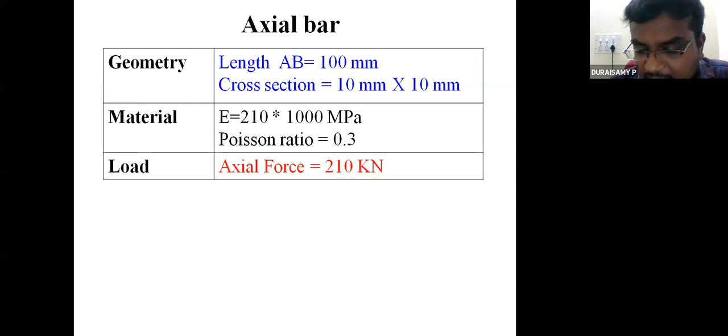So these are the parameters, shown graphically in pictorial view. At the bottom, a 100 mm length is shown. A is one point, B is another point - left face center is A, right face center is B. The distance between these two points is 100 mm, and the cross section is 10 by 10. This is the pictorial view of the geometry.

The material used is steel, with properties of 210 gigapascal and Poisson ratio 0.3. The axial force is highlighted at point B, acting along the length direction, along the 100 mm direction, with a value of 210 kilonewtons. The force acts at point B, while point A is fixed.

In this case, we are going to calculate some parameters associated with the problem. The end A, the surface pertaining to face A, is perfectly fixed. At the surface at point B, you apply a load of 210 kilonewton, which is an axial force. Because of this force, what can we expect? If you are doing a test with this kind of specimen, this load, these conditions, what can we expect? Generically, with the help of the material, we can calculate the stress - how much stress develops because of this much force.

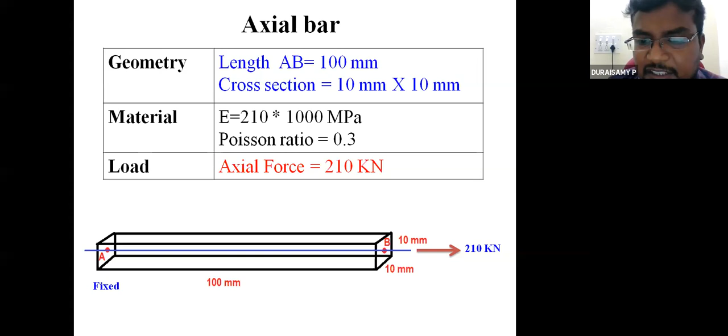Second, we can calculate the elongation of the bar. If you apply this much force, how much does the bar elongate? Those two things we can calculate very easily from strength of materials, so that's what I did - I will show that. The bar is fixed at the left end, and we apply the force at the right end, at point B.

Just assuming the point at B, we are not applying the force on the section, just applying the point. So for understanding, we can call this stress. Stress is nothing but force by area.

Fine. So force is 210 kilonewton by area 10 by 10, 100 mm square, and stress is this much. Just took the number, don't worry about the mathematical calculation behind that, just get the number of it. Second thing is deformation or elongation, both you can use it. So what is the deformation? The formula from strength of material, just substitute all the parameters, and you are getting 1 mm.

I can able to calculate stress as well as deformation. Now the 1 mm is elongation, right? So 1 mm elongation is happening at which place of this structure? Can you able to justify it? Students or participants, kindly unmute your mic and give your knowledge, or just justify it. Whether the 1 mm deformation or elongation is happening at what location of the structure, the axial bar.

Just to make it interactive, then only we can able to understand and appreciate it later on stage.

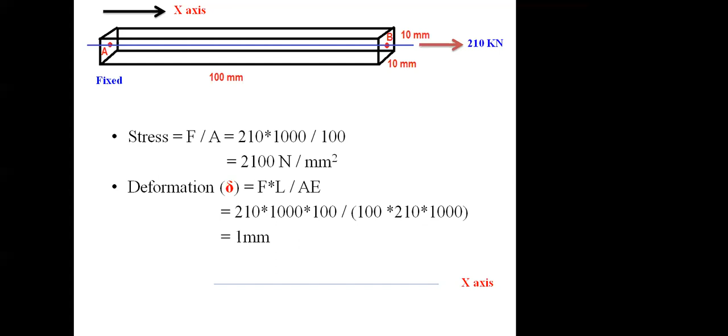Okay, participants, faculties or students, kindly post your answer to this in the chat box. The deformation 1 mm is exactly, you can able to measure at which place of your structure. The 1 mm we are getting out of simple calculation, it's fine, very happy with the result. But 1 mm deformation or elongation, exactly at what location is it happening? Whether end A or end B or somewhere in between point A and B.

So end B, okay fine. Someone is saying at the center, and most of the answers, majority is end B. Okay fine, so the 1 mm elongation is happening exactly at the point B. A is perfectly fixed, so we cannot move it. So fixed means the deformation elongation is equal to 0 as per our conceptual understanding. So end A is equal to 0, end B is equal to 1 mm.

That's fine, so we can represent it in another diagram. In 2D view, end A, end B, then B is moving 1 mm. So B is moving from B to B dash, so we are getting delta is equal to 1 mm. These results we are getting from strength of material, elementary strength of material concepts.

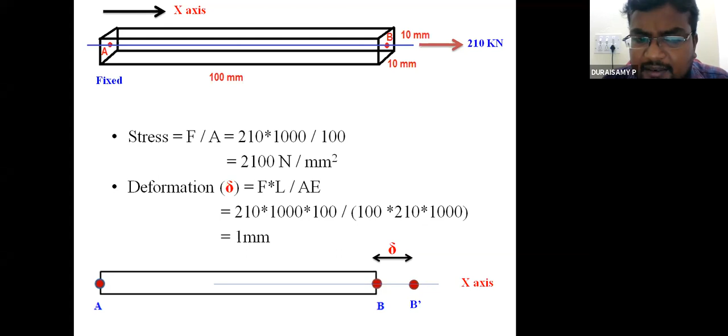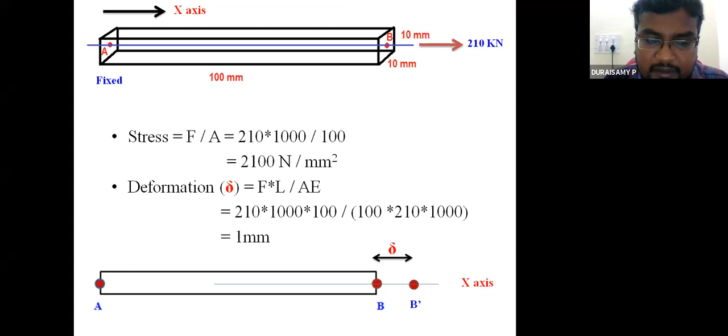Now my requirement is, I would like to calculate the elongation at the midpoint of the structure, or somewhere else, not at B, not at A. Just my requirement is I should find out the value of elongation at the midpoint of a structure, or somewhere else. Then what I can do? Whether my strength of material will help to calculate the value. Actually strength of material, it is not easy to do that. There is no way to get it in the simple deformation delta formula. It will give only the free end elongation.

So in this situation, I would like to calculate at the point C, which is 50 mm from A, it means exactly at midpoint. So in this situation, finite element analysis will help us get the value, to get the elongation at point C. So how are we going to get the value of elongation at point C? We will see what procedure you have to adopt to get it in finite element analysis. The deformation or elongation at any point of structure, strength of material will give the idea that elongation is happening 1 mm only at the point B.

That's all we can get from strength of materials - it won't give more than that. If you want the elongation of the structure anywhere, at any point, you can only get that from finite element analysis. At this point, we have to think and talk about FEM, finite element analysis.

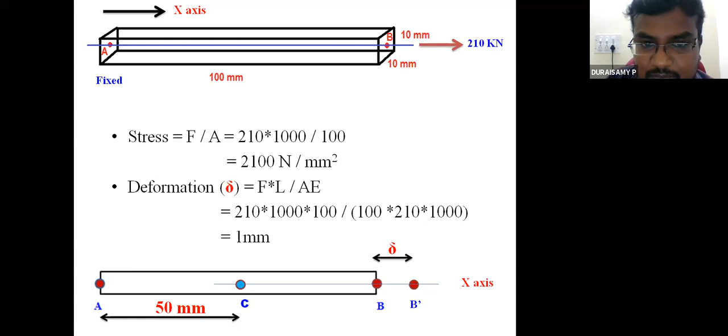So my requirement is to calculate the elongation at point C, the deformation at the midpoint of the axial bar. From these existing calculations, you can infer - not assume - that we can get the deformation or elongation happening only along the axis of the structure. We are ignoring the other two directions, so only the length direction is calculated - how much it's elongating in that direction.

We are ignoring the other two dimensions because the structure dimension is 100 mm by 10 mm by 10 mm. So 100 is a huge value, 10 by 10 is a smaller value. Because of that, whatever response happens in the 10 by 10 cross section, we are ignoring that study. One more condition is the left end is fixed - we are saying that end is perfectly fixed, so there is no movement, the displacement is fixed at the fixed end. These are the two inferences from the problem.

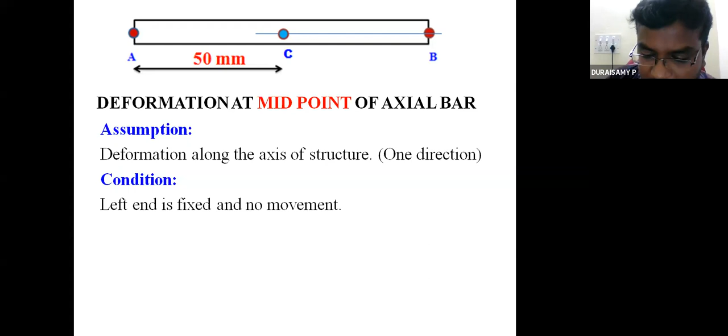Now we have to introduce finite element analysis - how this will be helpful. FEM is a purely numerical technique. It will give an approximate solution to the problems. It will try to give exact solutions, but it is a numerical technique. If you modify the problem, fine tune the problem-solving methodology, fine tune the parameters you're using, only then can we move closer to the exact solution. So it won't give the exact solution at the beginning stage itself.

So this is basic FEM - it's a numerical technique that gives approximate solutions to boundary value problems. It won't give the solution for initial value or time-dependent problems at this stage.

The first step is discretization of the structure - you have to divide the structure into different subdomains. Then step 2 is to select appropriate polynomial equations for the divided or discretized subdomains. We have to formulate the element stiffness matrix, assemble the stiffness matrix of all elements, and form the load matrix and total load matrix. Just read through these, then we'll discuss one by one in detail.

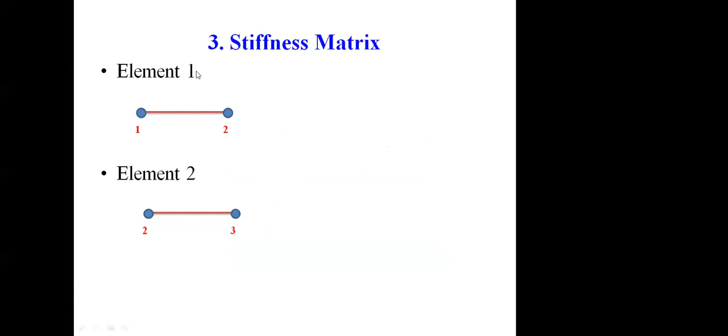Is it visible? Yes, sir. Okay, fine.

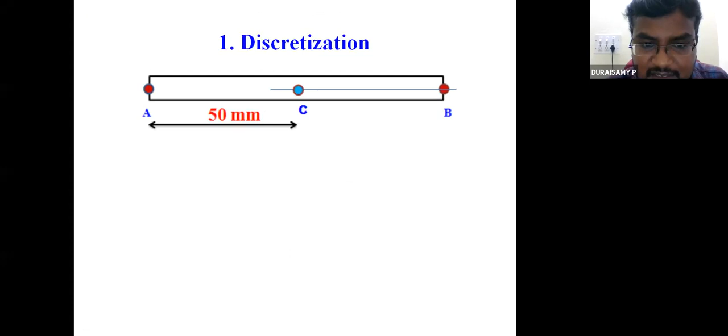We are dividing into just two domains. Just remember this: A to C is element 1. So A is replaced by number 1, C is replaced by number 2, then B is replaced by number 3. So 1 is A, 2 is C, just numbering from the left end. So A is 1, C is 2, then B is 3. That's the number I used for the calculation. So element 1 is 1 to 2, element 2 is 2 to 3. So we have two elements.

We have to formulate some stiffness matrix, what it means. Before that, just get some idea. One more thing I'd like to convey.

Everybody knows the spring, how it behaves, and what is the equation to capture the spring behavior. The thing is, force equal to K into X. Force is the load we are applying. K is the stiffness parameter of the spring. X is equal to displacement because of the load. If you are not applying the load, the displacement is equal to 0. That is the fundamental equation of spring.

So we are incorporating this equation as the equilibrium equation in finite element methods. How can we incorporate it? What way can we incorporate it? There's so many questions that will arise while directly introducing the spring equation into the FEA. How does it happen? Simple, I will show this for justification purpose.

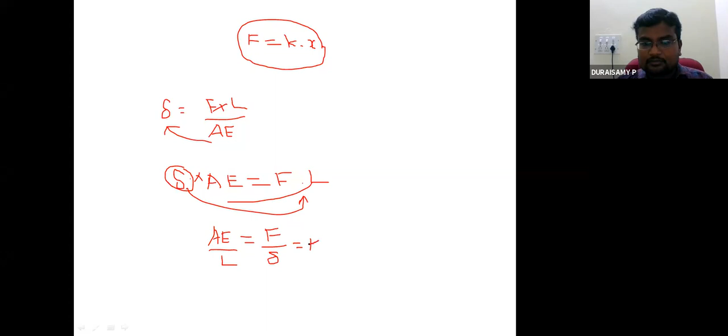Simply, force by deflection is equal to stiffness K. So we can equate these two with a spring, and we can say this one and this one are also equal, all are equal. So we can say AE by L is equal to F by delta is equal to K. So the meaning of stiffness is equal to force by delta equal to AE by L. A is the cross sectional area of your geometry, E is Young's modulus of the material, L is the length of your element.

Just rearrange this equation, take only this portion: F is equal to K into delta. This is similar to our spring equation. It's not only applicable to spring, you can use it anywhere. So force is equal to stiffness into deflection or elongation. Here X is the symbol used, here delta is used, that's all. In our calculation, U is used to represent the displacement. The meaning remains the same, only the letter or symbol is changing. So force is one thing, stiffness is another, and deflection or elongation is the third parameter.

So we have to get the value of delta by having F and K in our hand. If you have F and K, it's very easy to get delta. So first we have to formulate F, the load, and formulate stiffness K. If you have these two in hand, you can get delta very easily. First formulate K, then formulate the load, then substitute in this equation to get delta. How does this equation look? All are very well-known equations, you already know mathematics well. So A into X equal to B, that is the format the equation is framed in. X is equal to, finally, A inverse into B.

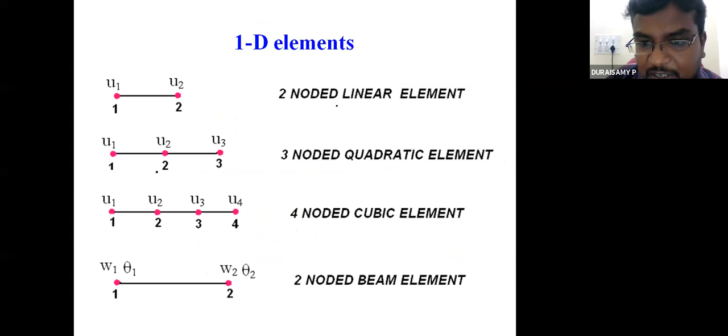So from this, we should have K in our hand, F in our hand. We just have to formulate K and F. K is the stiffness matrix, that's why the third step is stiffness matrix. This is what I showed in my steps. Step 3 is formulation of elemental stiffness matrix.

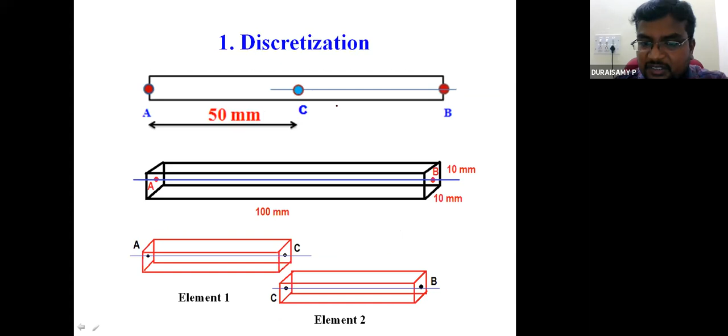Why is stiffness introduced? I gave a simple explanation of why K is coming into the picture. So K is EA by L, 1 minus 1 minus 1 1. This is the stiffness equation. How it came? There is mathematics behind this stiffness matrix.

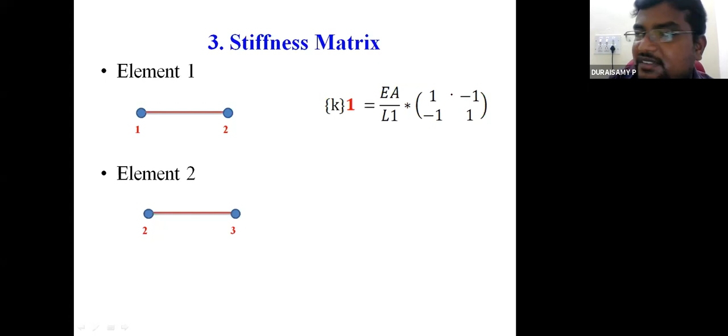It will take some separate discussion to cover this derivation. Just remember this: for this case, this is the stiffness equation, stiffness matrix. With this memory, we can move forward to solve the problem. If time permits, we will discuss how K is arrived at with this expression for this case. We will discuss if time permits. So first, just get the idea at this stage, but just remember this: K is equal to stiffness matrix.

1 represents element 1. EA by L1 into 1 minus 1 minus 1 1 - this is the stiffness matrix. How EA by L1 came? That can be simply justified right here.

Just see here, K is equal to F by delta, F by delta is equal to EA by L. So K is also equal to EA by L with the matrix. That is how the parameter came there. EA by L we can understand from here itself, but how the matrix came is a separate mathematical derivation behind that. So EA by L comes from this, but the matrix we have to take a separate discussion to get.

So EA by L - L represents the length of the element. For element 1, L1 is used, L1 is the element 1 length. E represents the Young's modulus of your material, A is the cross section of your element. 1 minus 1 minus 1 1.

Why? We have only two nodes - node 1 here, node 2 here. That's why this is a 2 by 2 matrix, that's another justification. If you have an element with 3 nodes, it will be a 3 by 3 matrix. So that's it, the separate derivation you have to take care of. So nodes 1 and 2 give a 2 by 2 matrix.

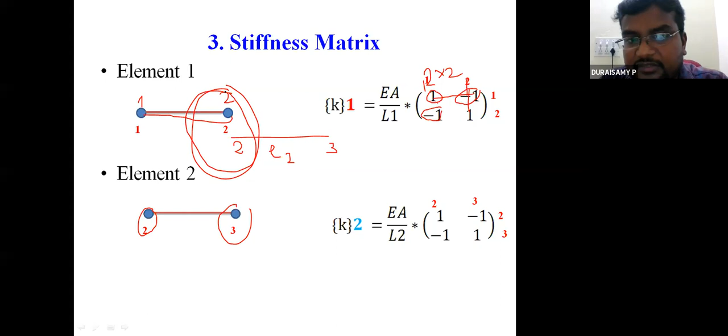That is the total stiffness matrix. These are the elemental stiffness matrices. If you have 10 elements, you have to formulate the corresponding stiffness matrix for each, and then you have to add them.

So K1, K2. I took only the matrix 1 minus 1, minus 1, 1 for elemental 1. Then 1 minus 1, minus 1, 1 for elemental 2. How will we connect them? Through connectivity. So element 1's K matrix, then element 2's K matrix connect, and we have to add.

So here this is the first position, the second node position. This is the 1, this is the 2, so this is the 2,2. Similarly here, this is 2,3, here 2, here 3. This is 2 and 2. So this 2,2 and this 2,2 will add diagonally.

So 1, minus 1, minus 1, 2, minus 1, minus 1, 1. The remaining places are 0. So that matrix becomes 1, minus 1, 0, minus 1, 2, minus 1, 0, minus 1, 1.

It is the total stiffness. We have only two elements to get it to exactly replicate the original structure. If we divide into 3 or 4 elements, we should have a 3 by 3 or larger matrix, and then you have to add them in this way. It's not just adding, it's connecting all the elements.

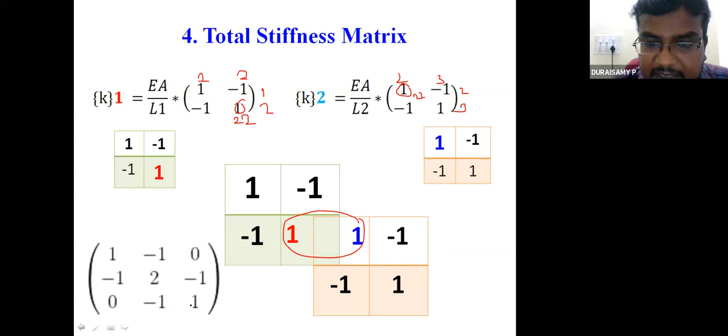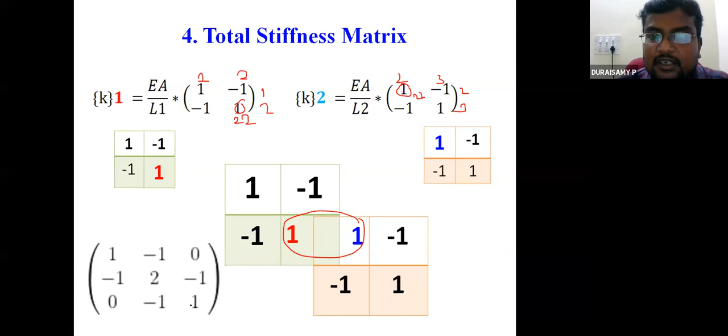So K is equal to total EA by L1. EA by L1, EA by L2. Both are Young's modulus same, area is same, L1 and L2 is same, so we can replace L1 and L2 simply by L1. That's why L1 is used. L1 is nothing but 50 mm, the total length divided by 2.

Then F is equal to K into U. So F is equal to K into U. K we already have so far. U is unknown. F is equal to the force matrix. So what are the forces acting on the element?

That is very simple, the element loading matrix. We have element 1. What are the forces acting in element 1? Node A is fixed, then the midpoint, there is no force either. This is node number 1, this is node number 2. There are no forces acting on node 1 and node 2. Node 1 is fixed, node 2 is midpoint, there is no load, so 0, 0.

Then for elemental 2, node 2 is the midpoint, there is no force there, but the force is acting at the right end. For example, in this case, node 1, node 2, node 3. This is element 1, element 2. In elemental 1 there is no force, so 0, 0. In elemental 2 there is a force acting at this point, at node 3 we have a force of 210 kilonewton. Just we are assembling it.

1, 2, and 3, as per the node order. So this 2, 0 and this 2, 0 will join, combined with the value of 0, into this force matrix. Then the overall equation will be substituted.

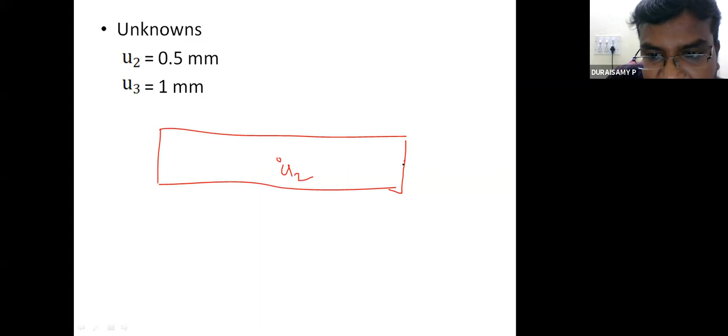U2 and U3 are nothing but points on our axial bar. The midpoint is U2, this point is U3, so the right end is moving still 1 mm, but my midpoint is moving 0.5 mm. With the help of the finite element method I am able to get this out. The stresses and strains can also be calculated. All the parameters can be obtained with the help of U1, U2, and U3.

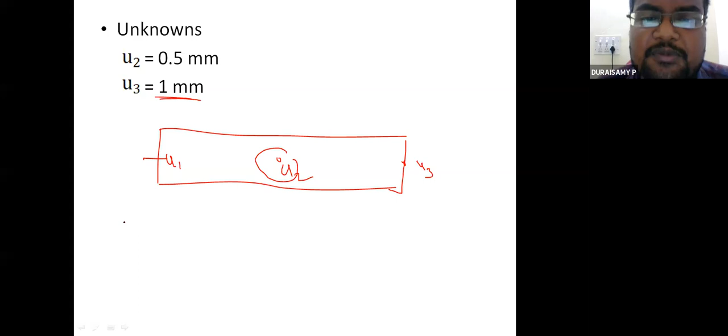U1 is equal to 0 for this problem because the left end is perfectly fixed. This is the way we have to follow to solve any kind of problem. Now just let me show one more thing: the same problem divided into 4 elements.

We are dividing into 4 elements, so the total 100 mm length is divided into 25 mm segments: element 1, element 2, element 3, element 4. We assume we are having 5 nodes, with one node here and another node there. This is only a 2-noded linear element, not quadratic or cubic.

Just by increasing the number of elements we can get more detail. For example, this is U1, U2, which you can calculate. This is 25 mm from the fixed end. U3, we already know, moves 0.5 mm, and it is 50 mm from the fixed end. Similarly you can calculate U4, which is 75 mm from the fixed end, and then get U5. Initially we have to decide how many points, or what locations, we are interested in calculating responses, and divide accordingly.

The corresponding stiffness matrix K remains the same: EA/L times [1 -1; -1 1], with K1 for L1 as element 1, L2 as element 2, L3 as element 3, and L4 as element 4. So we have 4 elements and 4 stiffness matrices, and we have to arrange them. Earlier you saw only 2 elements, which was simple, but with 4 elements, how do we join them?

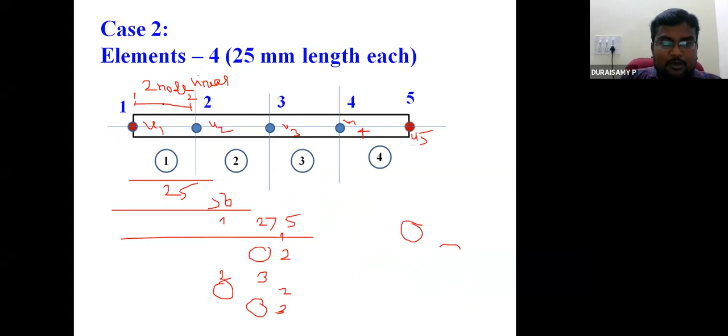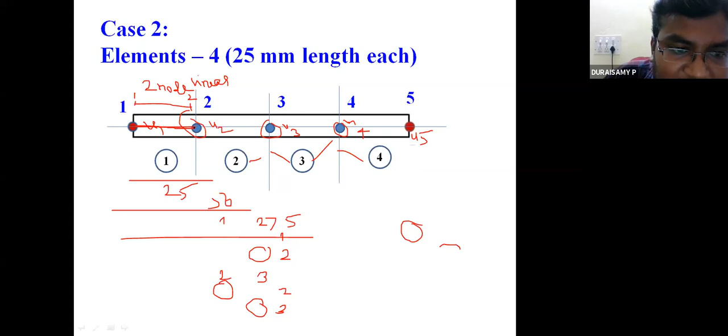The connectivity is: node 2 connects element 1 and 2, node 3 connects element 2 and 3, and node 4 connects element 3 and 4. That's why we place them diagonally, and the rest of the elements are 0. So we can understand: with only one element, element 1 has 2 nodes, so the K matrix size is 2 by 2, since it has only 2 nodes. The total assembly has how many nodes?

Just imagine, just count it. We have 5 nodes, so element 1 has 2 nodes, so its size is 2 by 2. The total structure has 5 nodes, so the total matrix size should be 5 by 5, not more than that.

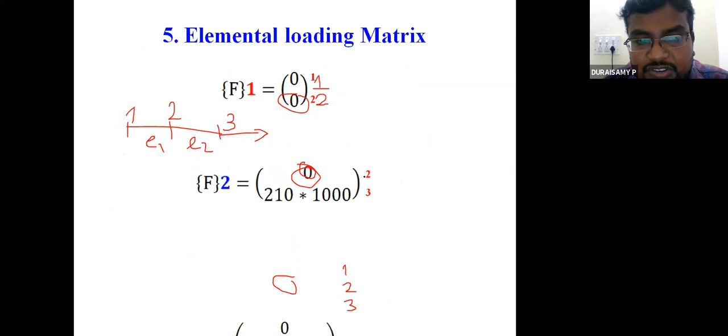In this previous case also, you can apply that. Here we have only 2 elements but 3 nodes: node 1, node 2, node 3. So the total structure has 3 nodes, so we have a 3 by 3 matrix.

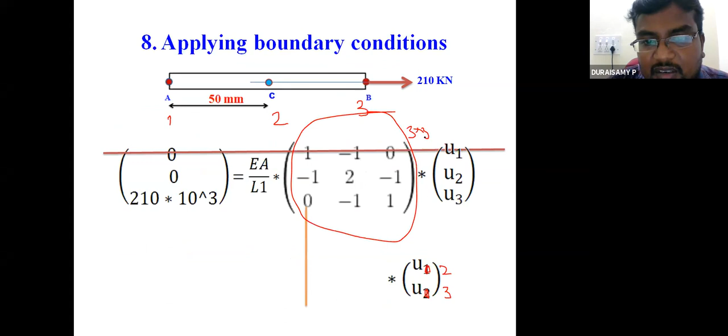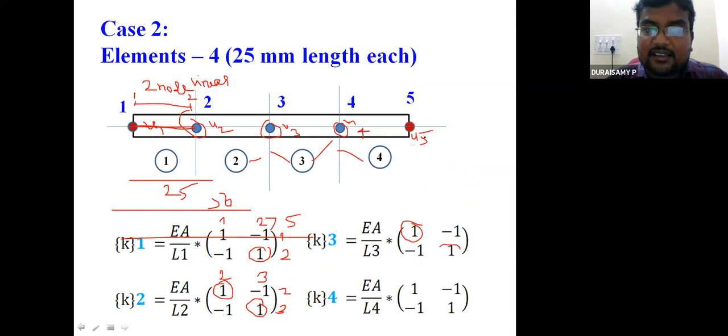Here in our case we have 5 nodes, so our final matrix size should be 5 by 5. You have to ensure that. If you increase the numbers, then the size of the matrix will increase.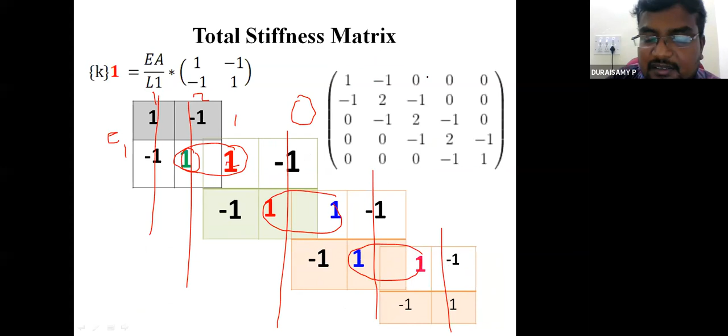So just after assembly, feel that this is 1, 2, 3, 4, and 5. I will show this 5 by 5 matrix, the rest of the things are 0. EA by L1 will come in this place. I've shown only the matrix alone, the 5 by 5 matrix. We have 4 elements, 5 nodes, so the matrix size depends on the nodes.

So we have the stiffness matrix, then the force vector. For force, we have 5 nodes: node 1, node 2, node 3, node 4, node 5. We are applying the force only at node 5, so only that force value is nonzero, the remaining is 0. Then unknowns U1, U2, U3, U4, U5 for the 5 nodes, 5 unknowns.

So far, we are using U1 equal to 0, that is our fixed end. U1 is equal to 0. You have to assemble it, apply it, then solve it. So we assemble here the overall global equation, then we strike out, because U1 is equal to 0, we strike out the first row and first column. The remaining parameters we take into our calculation are U2, U3, U4, and U5.

So how do we get U2, U3, U4, U5? Is it possible to get it from a calculator? No, our calculator can only handle a 3 by 3 matrix, it cannot go more than that. So if your matrix size is more than 3 by 3, for 2 by 2 you can solve very easily, but if it goes more than 3 by 3, you have to use solvers like MATLAB or Scilab. It's a powerful tool to take care of this mathematics.

So we can say this AX=B is a simple mathematical concept, a system of linear equations. You can use this concept to get the unknown U. X is nothing but U, so you can get U2, U3, U4, U5 out of it. How to get it? I will show a simple demo on that. Just bear with me for a few minutes.

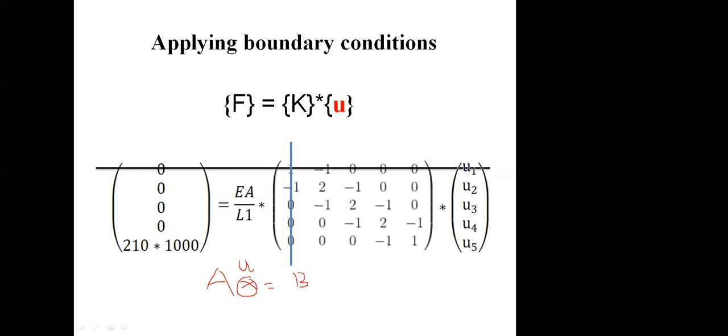Scilab can be used for any mathematics. If you have any numerical calculation, you can do it here. You can solve this matrix, AX equal to B is going to be in that format.

First you have to enter the matrix of A and B. Then you can get X is equal to inverse of A into B. That is the manner. So A equal to, you have to enter the first matrix.

So 2 minus 1, right sir? Yes sir, -1, 2, -1, 0, 0, 0. That's a 4. Only we have, initially it's a 5 by 5 matrix. We have striked out 1 row, 1 column, so it becomes 4 by 4 matrix, only 4 row, 4 column. The first row is 2, -1, 0, 0.

We have to put the semicolon to separate the rows. The second row begins with minus -1, 2, -1, 0. It's the second row. Just a semicolon, it will tell the software to put in the rows, separate rows. So 0.

Next row sir: 0, -1, 2, -1. Okay that's fine, this is the third row. The fourth row, I think, is 0, 0, -1, 1. This is the fourth row.

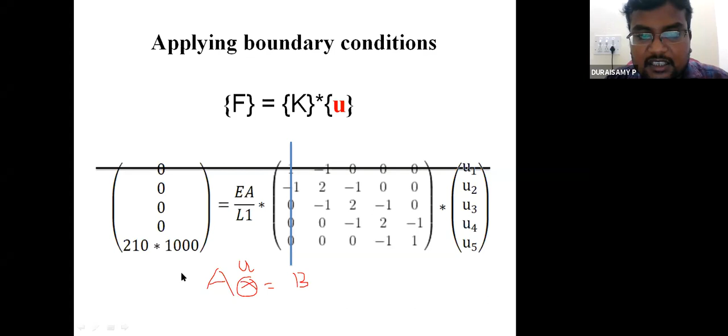So that's my PPT. Just after eliminating it, substituting and dividing it, you will get this U2 is 0.25, U3 0.5, U4 0.75, and U5 1 mm. So just you have a structure.

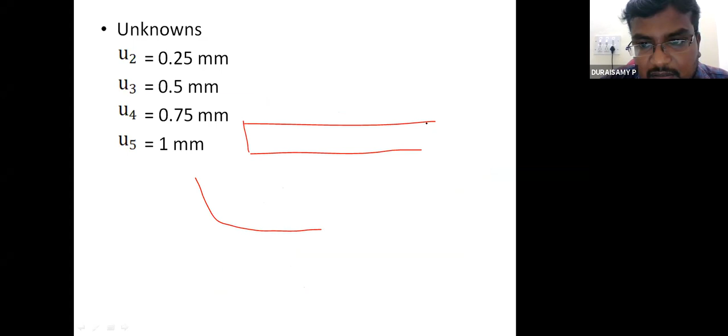You have a structure of node 1 and node 2, node 3, node 4 and node 5. So we already know node 5 will move 1 mm from strength of material, and previous calculation we came to know U3 will move, midpoint will move 0.5 mm. That's also ensured here. Midpoint is 0.5 mm, end is also 1 mm.

So strength of material concept is ensured. We can believe that. Initially we took 2 elements, in that also midpoint we get 0.5 mm. So that's also captured while solving the 4 elements, and another 2 nodes, the midpoint of this 2 and midpoint of this 2 also, it's 0.25 and 0.75 mm.

So FEM is a method you can solve any kind of engineering problems: thermal, structural, vibration and crash, and all the problems with appropriate unknowns.

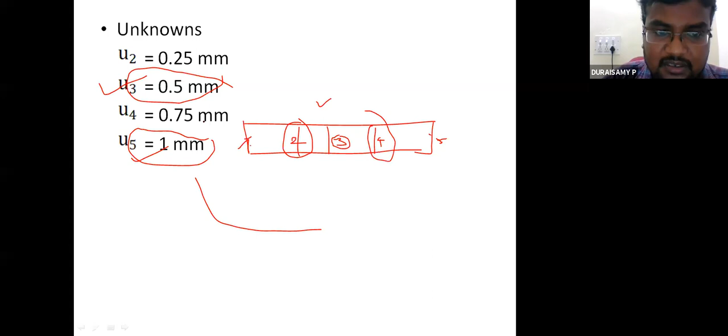The procedure is: we have a CAD model, divide the CAD model into elements, and element has nodes. Then you have to write the stiffness matrix, then assemble the stiffness matrix as per the element connectivity, substitute in the overall global equation, and eliminate or strike out the known parameters and get the unknown parameters, and use any MATLAB or Scilab or similar mathematical coding to do that.

And you can solve the unknown parameters: displacements in structural problems, in thermal problems temperatures, and in vibration problems also displacements. With this, we can get the other strains, stresses, and other parameters from the displacements.

So finite element analysis definitely will be helpful, and along with the numerical approach, it's an approximate approach. It is not exactly close to the actual value. It will be close to 95% of the exact solution.

It has some reasons why it is an approximation. For example, we have a curved geometry. Sometimes we cannot capture the curvature exactly. We can go with a straight line. We can eliminate this portion.

We cannot include this effect on the real problem, because sometimes we are ignoring it, or we cannot capture it. So in those situations, it's not exactly capturing the originality. So there is some approximation that comes into the picture. So it's 95%, very close for standard problems.

And if you have other real-time problems, it depends upon the problem and severity. Then as per the user's experience, we can decide what kind of level we have to set for the problem.